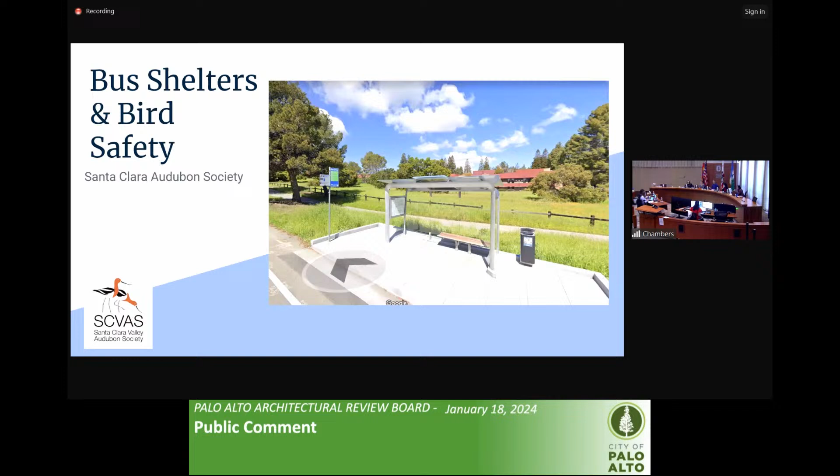My name is Shani Kleinhaus. I am the environmental advocate for the Santa Clara Valley Audubon Society. I live in Palo Alto and I'm on the PRC, but I speak for Audubon today. This is the presentation about bus shelters and bird safety. I have a little history with the ARB.

This is a bus shelter on Arrastradero. As you can see, it's in the Stanford Research Park, and as you can see, it's completely transparent.

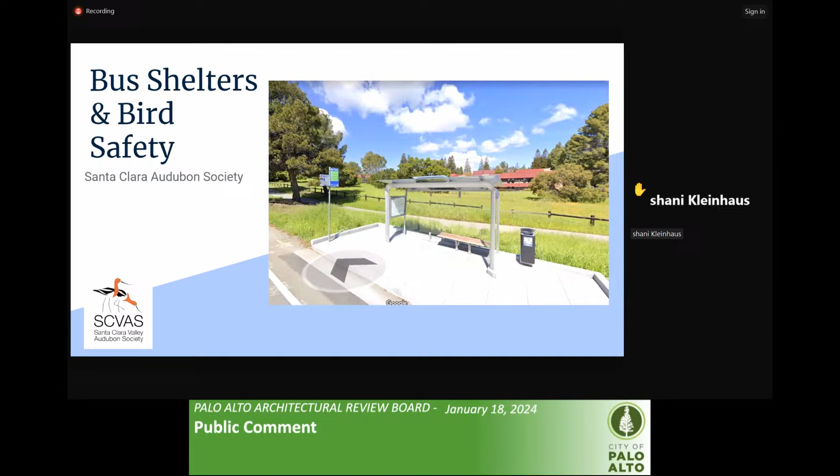Next slide, please. A billion birds die each year due to collisions with glass in buildings and other man-made structures. The science shows that it's best to avoid transparent structures, and if you use them, there need to be visual cues for birds. Studies show that dust and graffiti on bus shelters, as unpleasant as it is to the eye, actually reduce bird collisions significantly.

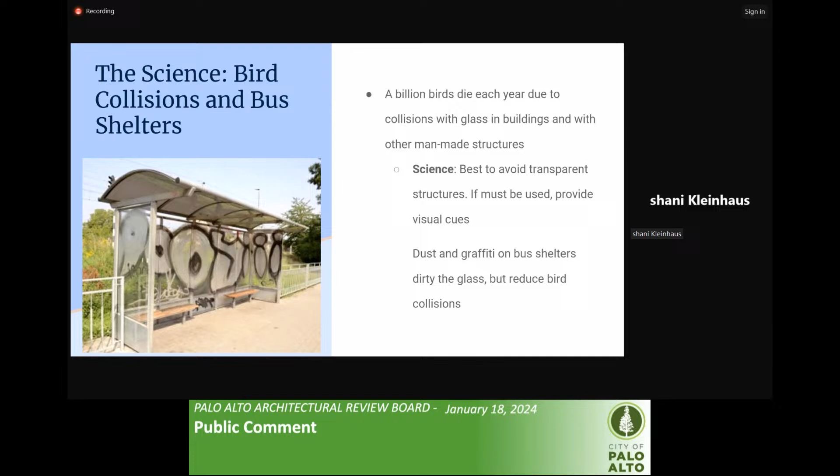Next, please. These are some shelters at Google. You can see they use cues both for people, those larger cues, and then the thinner lines and leaf patterns are also used for alerting birds to the existence of the shelters. Next, please.

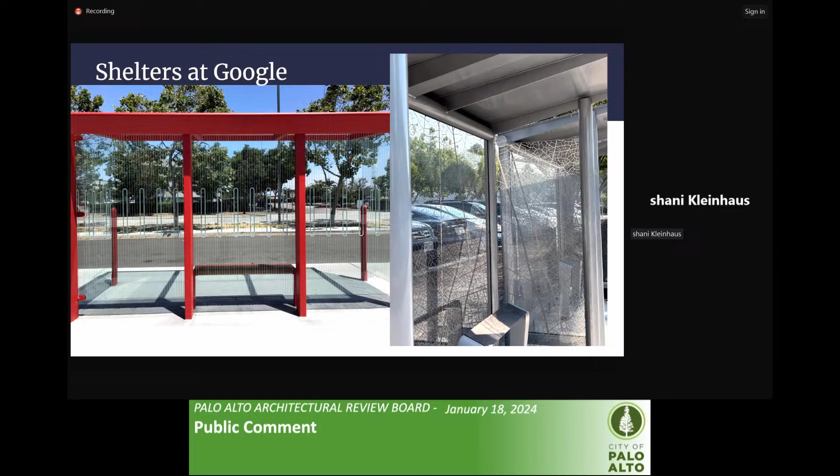So when I started seeing these transparent bus shelters at the research park, I approached our public works. I didn't know why these were approved. They told me it was VTA. I asked VTA, they said no, it's Stanford. I asked Stanford and I found out that it was the ARB that actually required them to do this. After a request from Stanford, last year they retrofitted the existing bus shelters with visual cues, and they promised to implement any new ones with the visual cues.

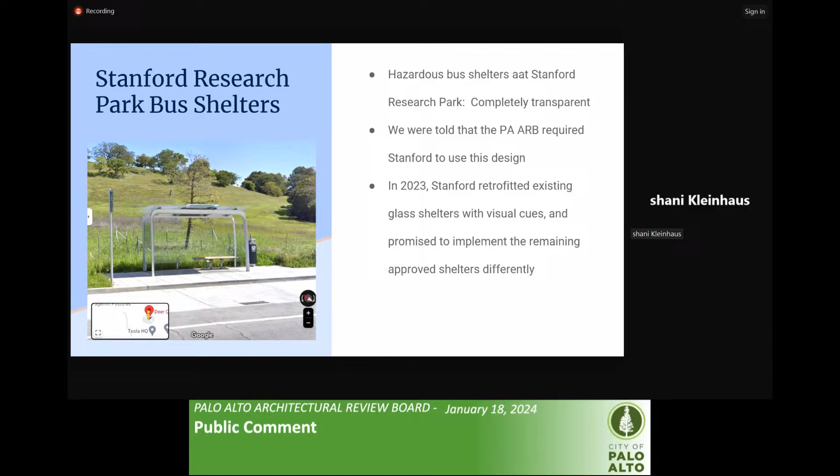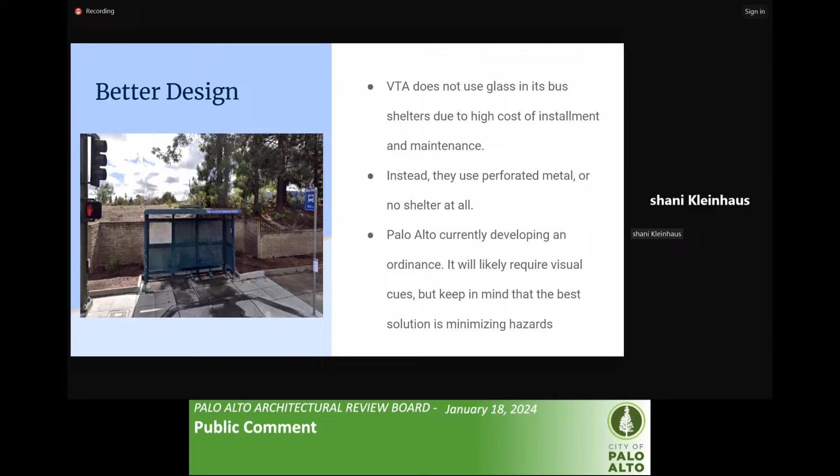So I wanted to just give a little pitch here. The VTA does not use glass in bus shelters, due to high cost of installment and maintenance. They use perforated metal or no shelter at all. Palo Alto is currently developing an ordinance for bird safety and dark sky, one or two ordinances, which will come to you soon, and will likely require visual cues. But I just wanted to remind you that the best solution is to minimize the hazards and not even create them at all, rather than to try and mitigate them. That's it. Thank you so much for your time.

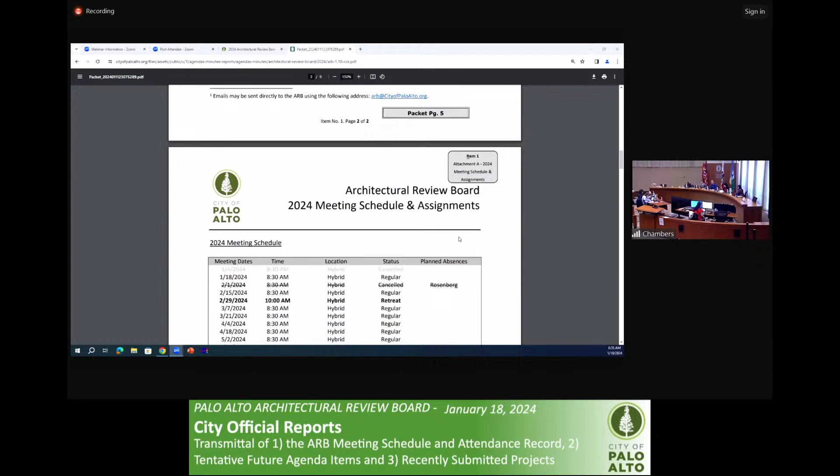So just to note that we are planning to cancel the February 1st hearing, but we do expect to have items on the 15th. We're kind of still resolving what that agenda will entail, but we do expect to have a hearing that day.

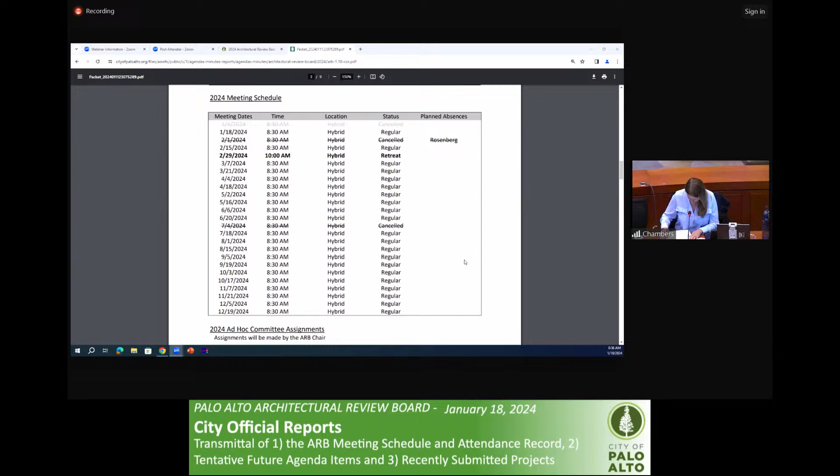There have been some new projects submitted. Hold on one second. There was a new project submitted at 833 Los Trancos Road out in the open space area. This is going to be an accessory structure, but it's a new building, and the open space requires a site and design review. So they are submitting an application that will come forward to the Architectural Review Board. It has an attached accessory dwelling unit, along with other accessory uses.

There is also the project before you today, 1066 East Meadow. And then there was a new project submitted, 3265 El Camino Real, which—I think this is the project that was looking to do teacher housing, right? Yeah, I'll update that summary, but it's affordable multifamily, 100% affordable multifamily, but also specific for teacher housing.

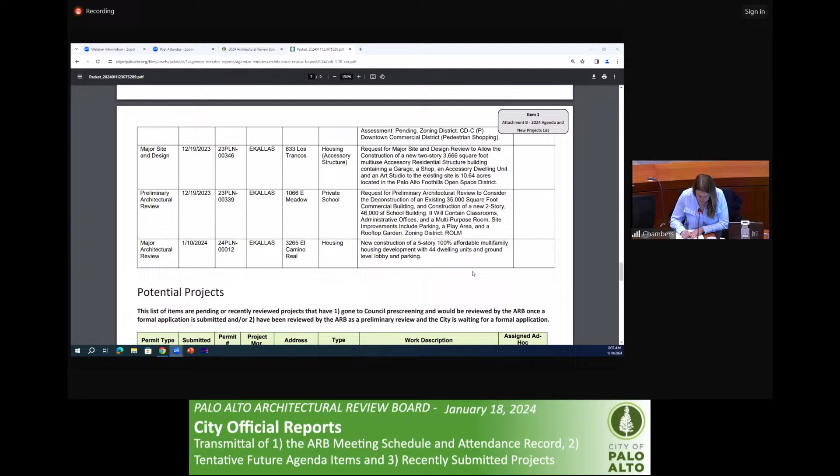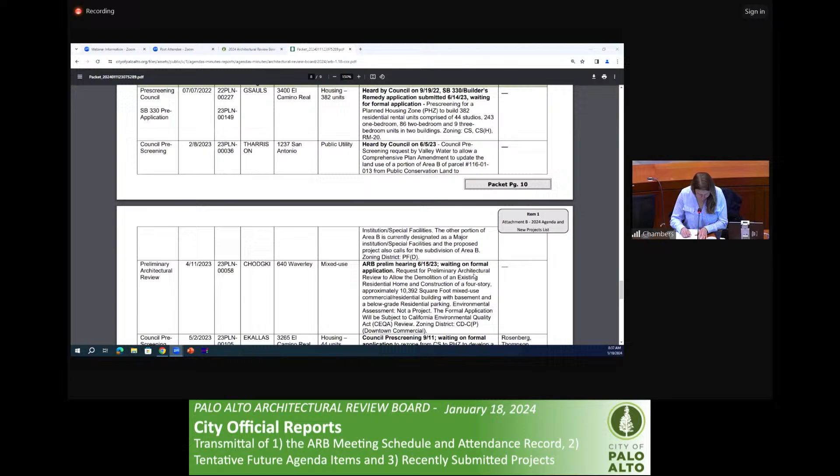And then there was a new SB 330 pre-application submitted along San Antonio Road at 762 San Antonio Road for 198 multifamily residential units. So if you would like to assign an ad hoc committee to any of those.

Wow, yes, we would. So colleagues, we have 4 projects that potentially need ad hoc committees. Let's go through them. The first one on Los Trancos Road, I don't believe requires an ad hoc committee. Does anyone feel otherwise? It's a residential small project.

The second one on East Meadow, that's what we're going to be looking at today. I suggest we wait till we finish hearing from this and then perhaps assign an ad hoc committee to follow up on that. Next one is a rather important housing project.

I'd very much like to assign an ad hoc committee to that. Do I have any volunteers? I'm seeing Board Member Rosenberg, Board Member Hirsch. I'd like to assign Rosenberg and Hirsch to that, please.

And lastly is the SB 330 project on San Antonio. I would like to be on that subcommittee. Would anyone like to join me? May I? Board Member Chen. So Baltay and Chen, please. Great, thank you.

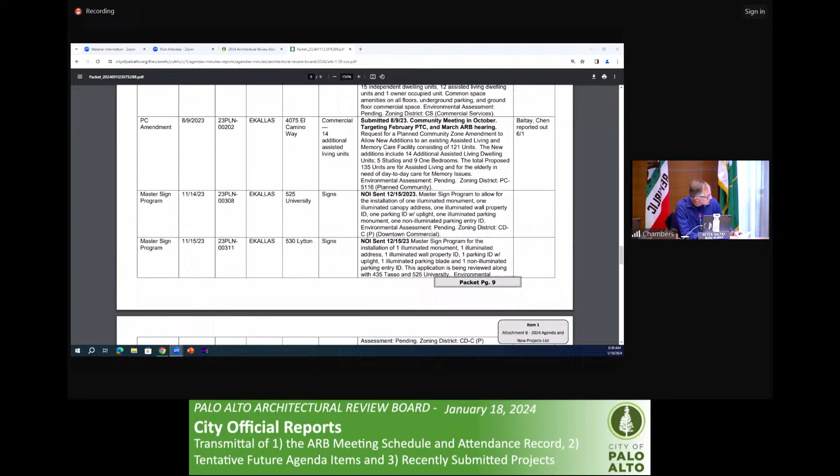In that vein, I'd like to ask my colleagues that we have 2 other ad hoc committees. One was on 739 Sutter. We heard that project recently, and I had assigned Board Members Chen and Adcock to a subcommittee. I'm hoping to hear back from you on the status of that project. I understand it's been resubmitted. And I'd just like to have our board follow up on that if we could. So this is a gentle nudge to stay on top of that one.

Wait, can I just add a quick note on 739 Sutter, if you don't mind? 739 Sutter did resubmit an application, and so I will send that out to you guys to take a look at the revised application. They did make some of the changes that were requested. Specifically, they did take off all the rooftop decks. So there are some somewhat substantial revisions that were made for that project. And just for clarity, it's board members Chen and Adcock.

Okay, thank you. And lastly, we have an outstanding ad hoc committee on objective design standards relative to townhomes. And I have in my notes that we'd asked Board Members Chen and Hirsch to report back to us with some proposal for what those standards might be. That was a bit of a homework assignment and we haven't heard anything back on it. And again, a gentle, maybe not so gentle nudge this time, that we'd like to get some progress on that. That's something the planning department is open to our suggestions on, but they don't have the resources to invest much themselves.

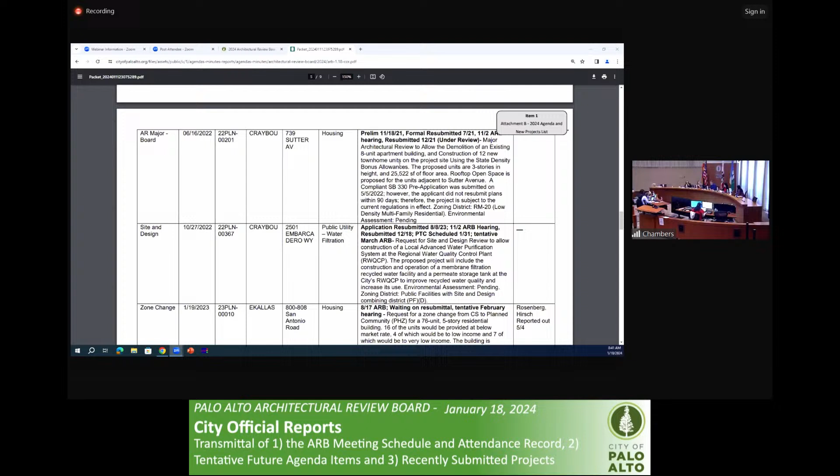And Chair Baltay, could you please clarify for the ad hoc committee what the specific final homework assignment is that we would be looking for? Sure. As I understand it, they did a bunch of research on townhomes, and sort of from a broad perspective, what development standards might be appropriate and useful. And we had asked them to try to formalize that into some actual language of what the standards might be. So it's actually writing out a series of objective design standards relative to townhomes.

So you have a budget for this? Just kidding, just kidding.

That's right. So we're looking for some stab at what that might be. We would have to coalesce behind it and feel that it's both appropriate and proper for passing it on to the planning department. But we have the opportunity to do that. We have been pushing hard to do that. So we've put that into subcommittee.

Yes? To respond a little bit- no, I don't want to discuss it now because it's not agendized. Just understand that we were sort of put off when planning told us that really there's no intention to move forward with something like this. So that's why we sort of stopped at that point. If you could speak into your microphone, Board Member Hirsch. I just heard you say you were put off when the Planning- well, we met with the director and he hoped that he would have some positive response, but he did not.

Well, I think we should be careful on that. It wasn't that he had a negative response. It was that there's pressing needs on staff's time, and he didn't feel he had the resources to put into hiring a consultant to develop this kind of thing.

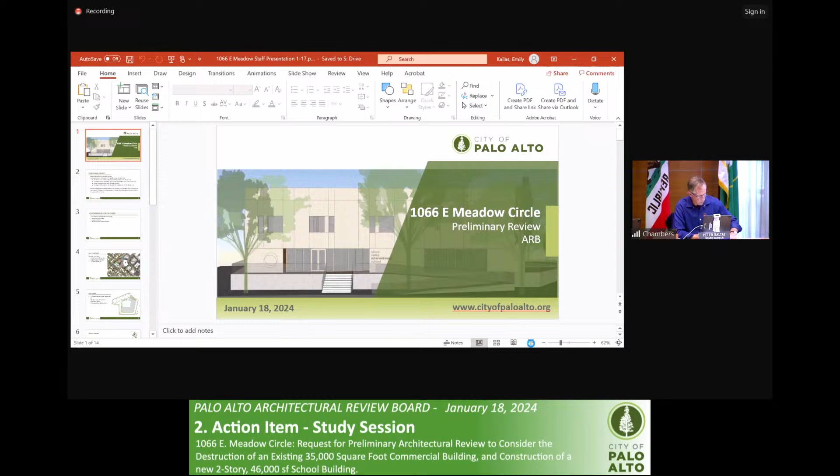So I remind everyone, this is a study session. We're going to hear from staff, we will hear from the applicant, we will hear from the public, and the board will provide comments and feedback on the proposal. We won't make any decisions or provide any recommendations to the planning department.

Okay, staff, could you go ahead please? Hi, good morning, my name is Emily Kallas and I am the project planner for this project. As Chair Baltay said, this is for 1066 East Meadow Circle preliminary review.

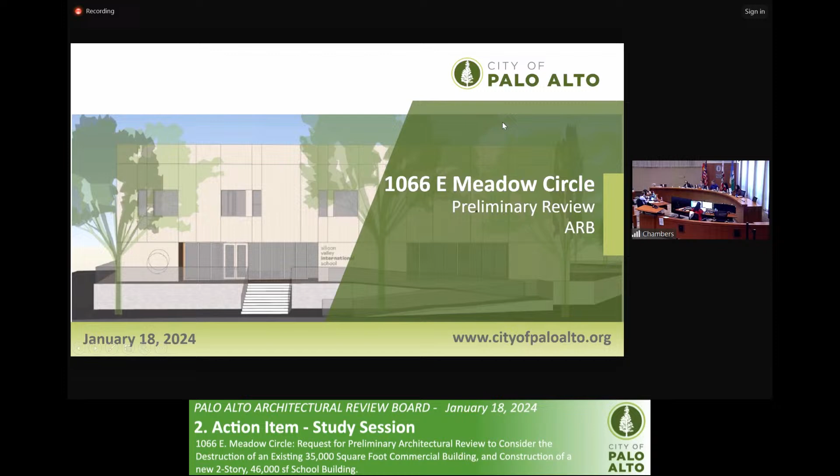The proposed project includes construction of a preschool through second grade campus with 26 classrooms and 3 multi-purpose shared spaces, for a total of 46,000 square feet. The project includes 3 outdoor areas, including one on the second floor and one on the roof. The site plan includes queuing space for drop-off and pickup and 58 parking stalls. This project is in the flood zone, so it also includes grading a 6-foot platform to elevate the building.

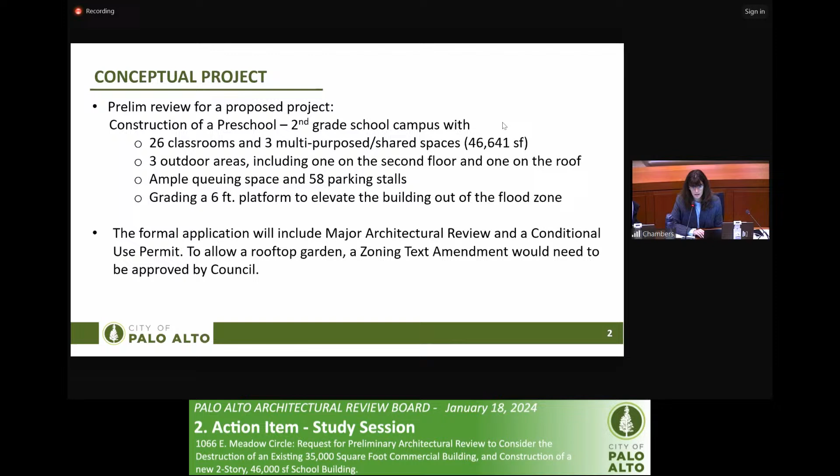The formal application will include major architectural review and a conditional use permit for the school use. Additionally, and I'll discuss it more later in the presentation, to allow a rooftop garden, a zoning text amendment would be required to receive council approval to amend the zoning code to allow a rooftop garden in this zoning district.

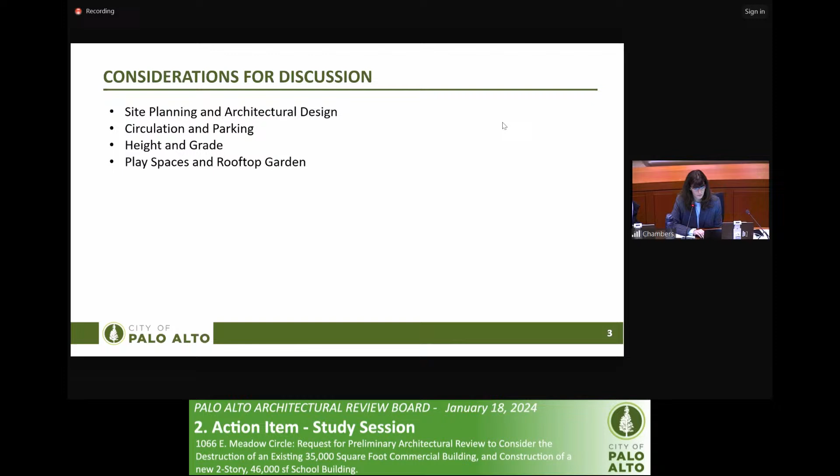Additional topics for consideration for discussion are the overall site planning and architectural design, circulation and parking, the height, grade and massing of the building, and the play spaces and rooftop garden.

This site context along East Meadow Circle is bordered by the Eichler Swim and Tennis Club to the rear, single-family residential neighborhoods off of Louis Road and Greer Road, and 1 to 2 story office uses on the circle itself. This property is also zoned ROLM, which is a research office and light manufacturing.

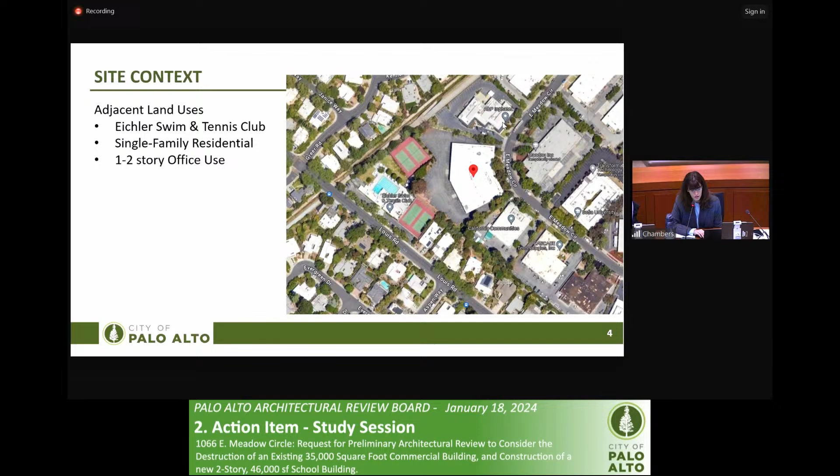The site plan includes a U-shaped building facing the parking lot area. There is a 2-lane wide drop-off corridor, 58 parking spaces, and the play yard shown here is built up at the platform level to have grade separation between the parking area and the play area.

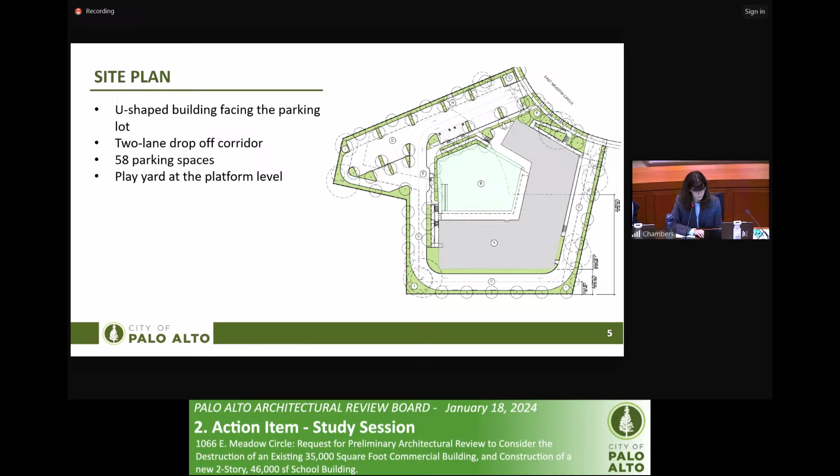This is an overview of the floor plans for the 2-story building with the rooftop garden.

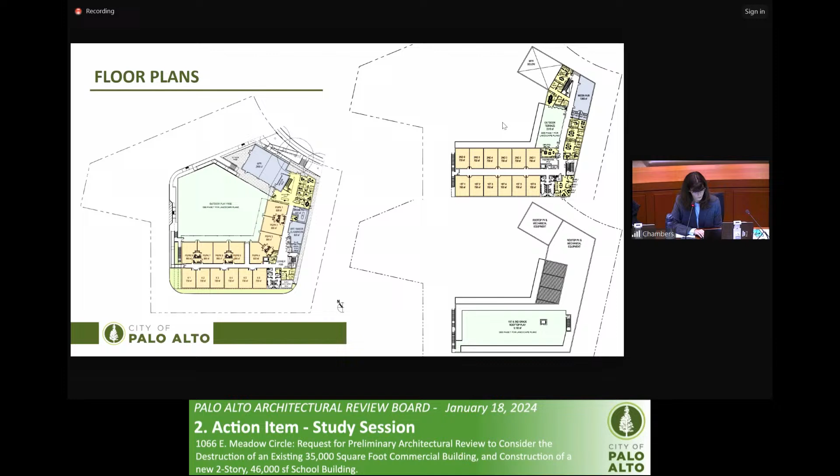One item to note, because this is in the ROLM zoning district, there is a floor area bonus for childcare facilities. So the portion of this project that is operating as a preschool, that area, which is about 8,000 square feet, is not counted towards the floor area maximum for the site. There is also a bonus to the maximum floor area equivalent to 50% of the floor area that is used as childcare.

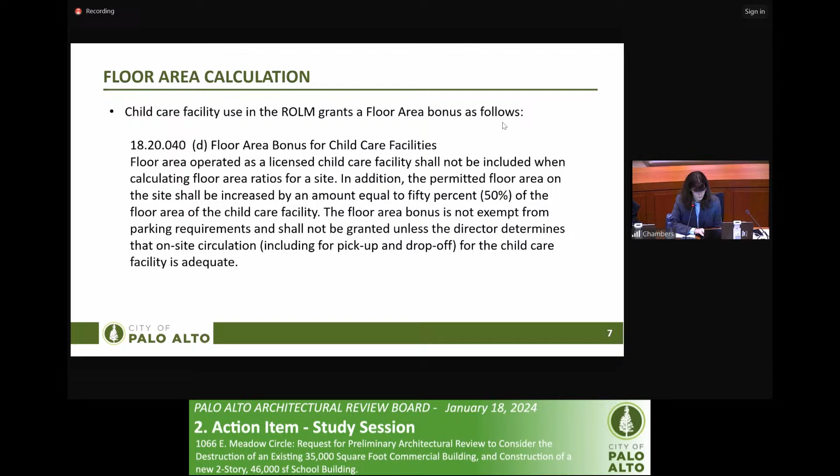These show the preliminary landscape plans. One item to note here is that a basketball court area is proposed for the rooftop garden. The second floor terrace appears to primarily be for seating, and then the first floor play area is the primary play space for the preschool through kindergarten grade levels.

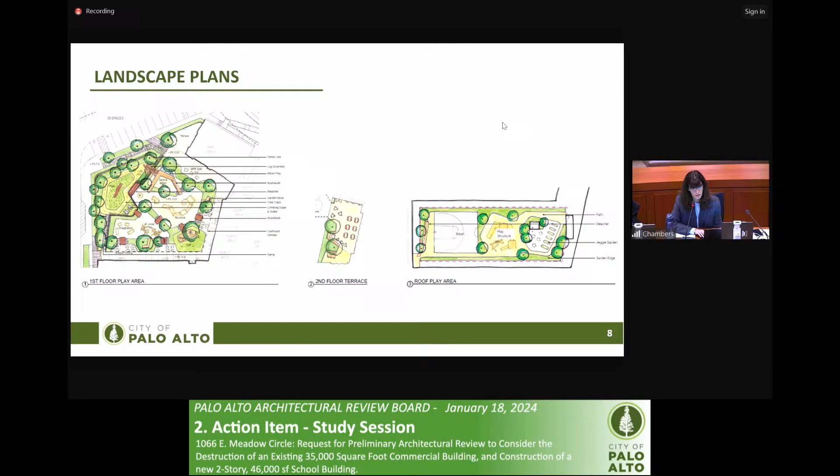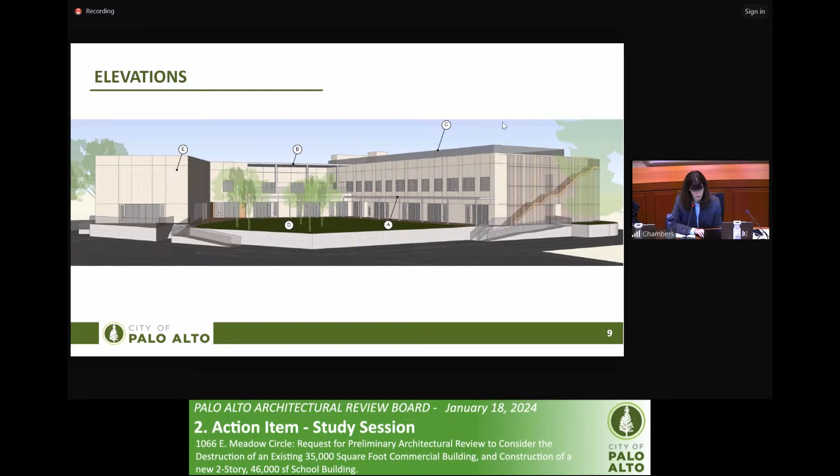These designs are still preliminary and would be subject to change upon the formal application, but we would definitely appreciate the ARB's feedback.

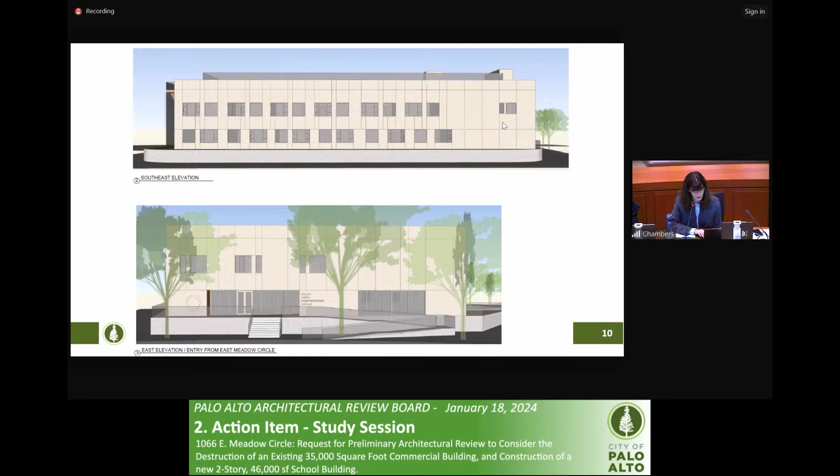Additionally, the rooftop garden shown is proposed to exceed the maximum height, which again would require a zoning text amendment.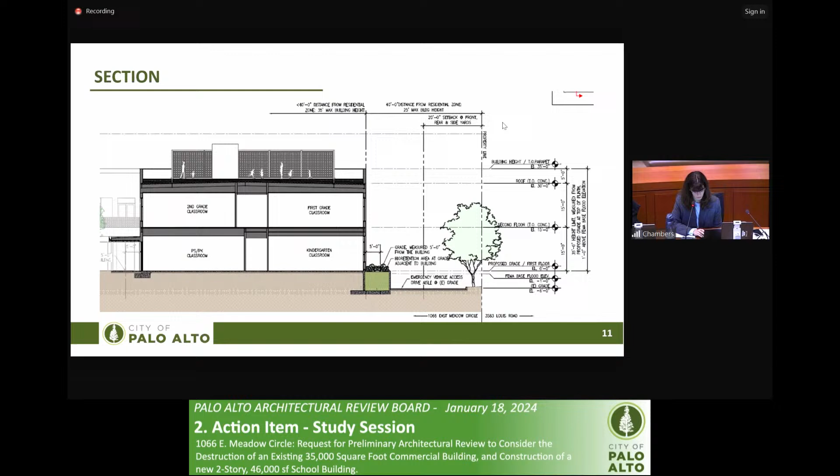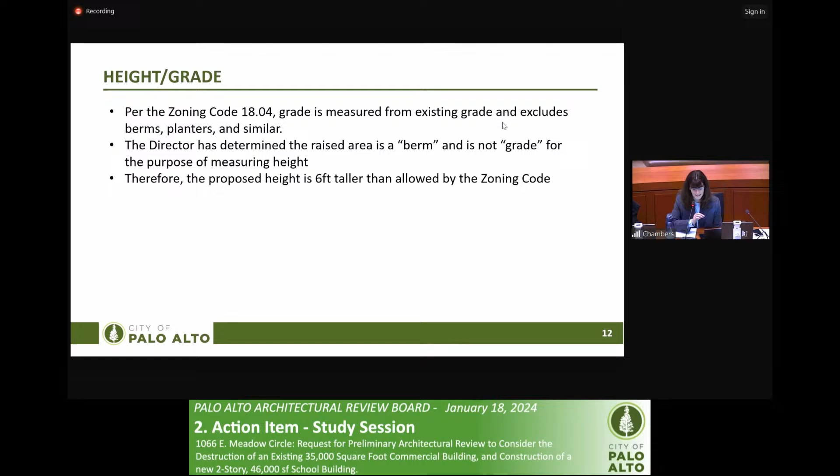Specifically in the definition section of the code, grade is measured from existing grade and excludes berms, planters, and similar features. Because this is considered a berm, that is why the height needs to be measured from existing grade.

This concludes my presentation. The applicant, Michelle Huber, is present and has a presentation as well. Thank you.

Before we move on, do we have any questions of staff on their presentation? Go ahead, Board Member Hirsch. Give us one second while we ask some questions.

On the floodplain issues, are you allowed to build into it as long as whatever you build has some kind of waterproof perimeter? Is that a possibility?

Public Works Engineering Department requires the finished floor of the building to be 1 foot above the base flood elevation. So in order to construct something that meets FEMA requirements and local regulations, it does need to be elevated somehow. The question here isn't about how much it's being raised, it's how the maximum height of the building is being measured, because they will need to elevate out of the floodplain regardless.

To follow up, that applies to habitable space, correct? Not necessarily uninhabitable space. For commercial versus residential, you can have uninhabitable space, like a parking structure, that could go there, but there would be a lot of waterproofing involved.

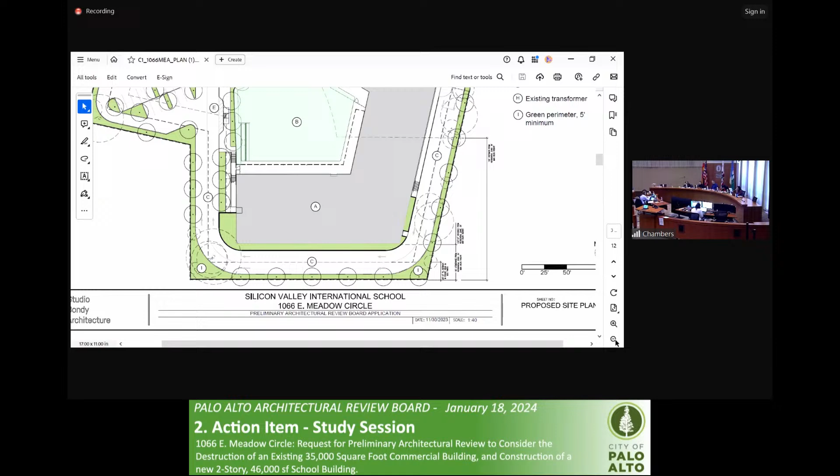You want to share your screen? Oh yeah, we'll share the screen for a second. Hold on. No, zoom out, or share the full screen. Yeah, zoom out. Zoom out, yeah, perfect.

So based on the street location, we would expect the rear to likely be, can you see my cursor? Either this one or this one.

But again, since the setbacks are the same on all of the sides, is there something in particular that it affected? It's 20 feet no matter what, whether it's interior or rear, gotcha. And there's no daylight plane requirement for it. Okay, thank you.

So you just passed a pop quiz, Emily.

Any other questions? Could you please explain to me, in the housing element this site is listed for housing, and I see in the report that it's not going to be any longer. Could you give us some background on that? We had a comment from one of the members of the public, a letter to us discussing exactly this question.

Yeah, so the adopted housing element right now includes this site. My understanding is that in some of the comments from HCD on our latest housing element, there were questions about the sites selected, asking for more assurance that certain sites would become housing, and/or choosing other sites more likely to become housing. So in response to HCD, there are some changes proposed to the housing element that would change some of the selected sites, including this site being removed, but others being added to still meet our RHNA. So whether council will adopt those changes or not is not yet known. But we have to treat it based on our current adopted housing element.

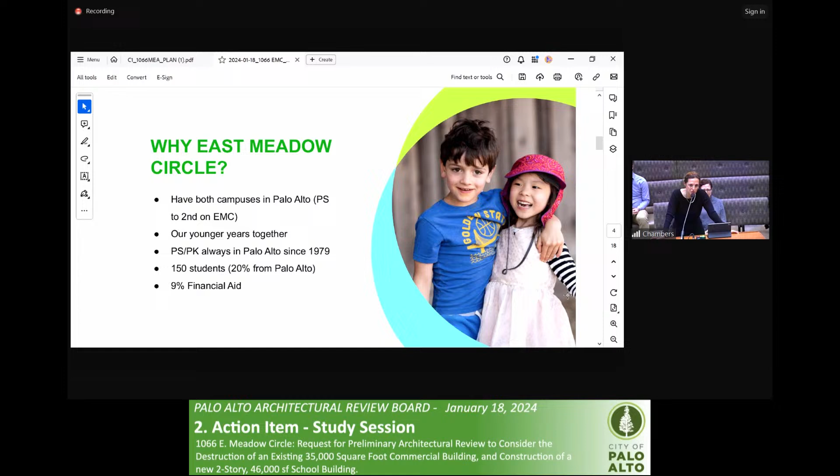Our school has this goal of welcoming students from all backgrounds, and therefore we dedicate 9% of our budget to financial aid. Last but not least, we've always been good neighbors in Palo Alto since 1979, and we intend to continue to do the same. We started open communication with our neighbors early in the process, sent them letters, let them know we were having this public hearing today, and so far we have received positive feedback from our neighbors. Thank you.

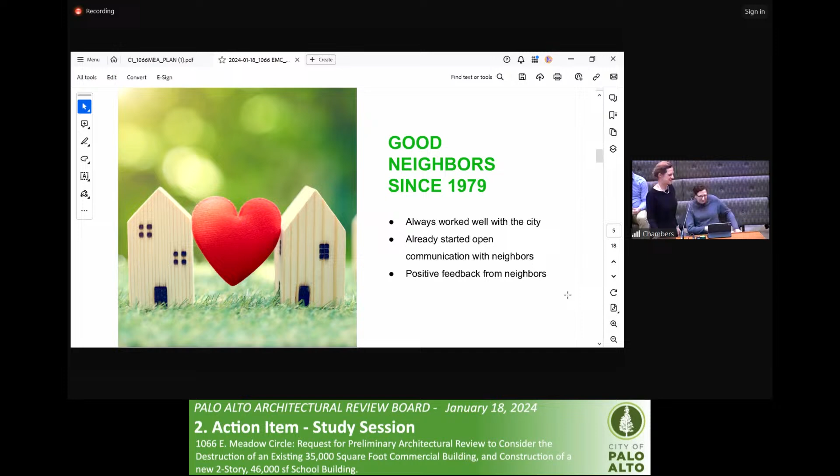Good morning, my name is Michelle Huber. I'm a principal at Studio Bondy Architecture. My name is spelled M-I-C-H-E-L-L-E H-U-B-E-R.

We are very happy to have the chance to present our project to you, answer your questions, and get your feedback. In particular, we hope to get your feedback on some of the elements discussed by Emily Kallas, which is our building height, our outdoor spaces and play areas, and in particular the rooftop garden. A lot of the images you will have just seen, but we want to add a little bit more detail and hopefully answer some of the questions that came up during the staff questioning.

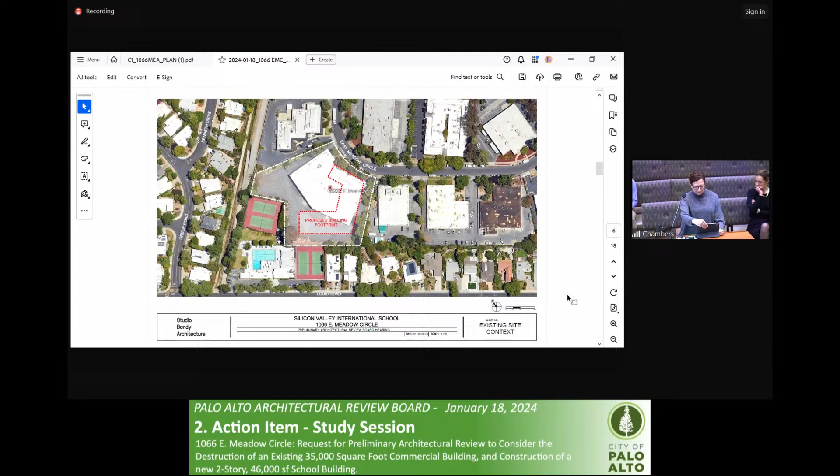Just to start, we have outlined our proposed building footprint on the existing site. In red, you can see it superimposed over the existing building. To give you some visual context, these are some images of our neighbors, and the existing building is the image at the top.

This is our proposed site plan, which has been a little bit developed since the images that we submitted with our application. We're showing the integrated context of the landscape design with our site plan.

The design intent for the site was to develop a site that would work best to support the school's program and mission, while respecting the context of the neighborhood, and in particular the privacy of our neighbors. So our design solution was to rotate this building so that it acts as a buffer, both acoustic and visual, for the large preschool play yard in the center of our campus.

As was described, our preschool program will have 160 students and will be licensed through the state of California, which will then dictate the minimum size of outdoor spaces for this play yard. For 160 students, that's 12,000 square feet, which is what we're showing in this design.

This play yard will be designed to be age appropriate and developmentally appropriate for preschoolers and also for kindergartners, so that they can use this site when preschoolers are not using it. However, it doesn't work for our older students in grades 1 and 2 — developmentally, the design doesn't support where they are developmentally and the gross motor skills they're learning.

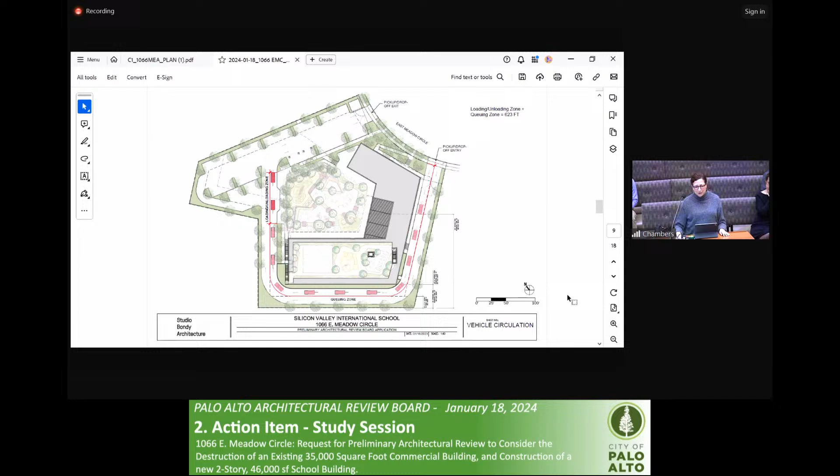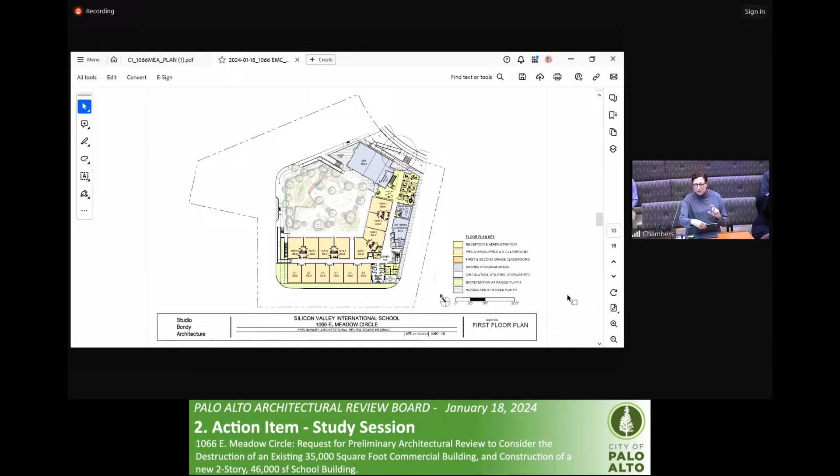The floor plans have already been discussed, so I'll just point out that the orange rooms in the diagram are our classrooms. Our preschool classrooms are designed to wrap around the preschool play yard and maintain a direct indoor-outdoor connection to those spaces. Our second floor we've discussed.

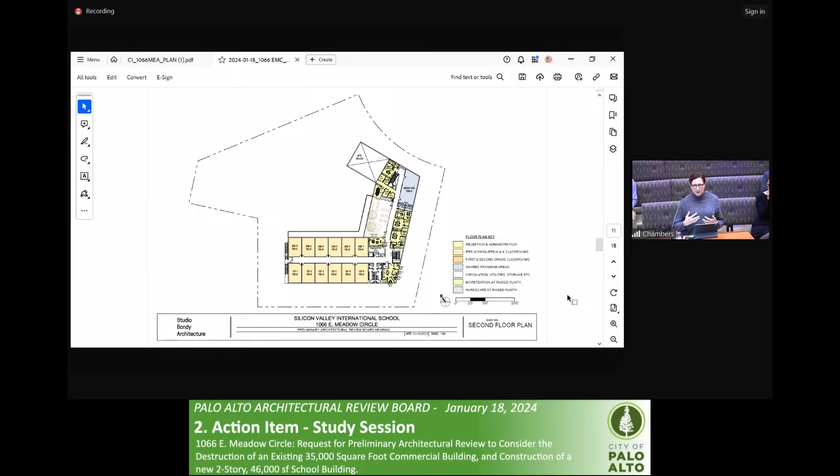The next two slides are diagrams that intend to show our design intent as we're trying to resolve two of the key challenges of the site.

We're in this flood zone, and per FEMA, we have no other option but to design our first floor to be 1 foot above base flood elevation, which raises the grade to roughly 6 feet. Because this is a requirement to build and develop on this site, our proposed interpretation of the Muni Code as it describes grade is that there's an exception when grade needs to be raised for drainage. It does exclude berms — berms cannot be counted as that point of grade, but elevated plains required for drainage are allowed to be considered grade. So our design proposes that approach to let us measure our building height from that new grade and reach the 35-foot maximum.

In terms of our rooftop garden design, we are proposing to locate all of the rooftop structures at a maximum of 12 feet above the allowed 35-foot height limit, which is our reading and understanding of the design guidelines for rooftop gardens. In addition, there's a 45-degree angle that describes where the rooftop structures are allowed to be located, measured from the edge of the building and the top of the roof.

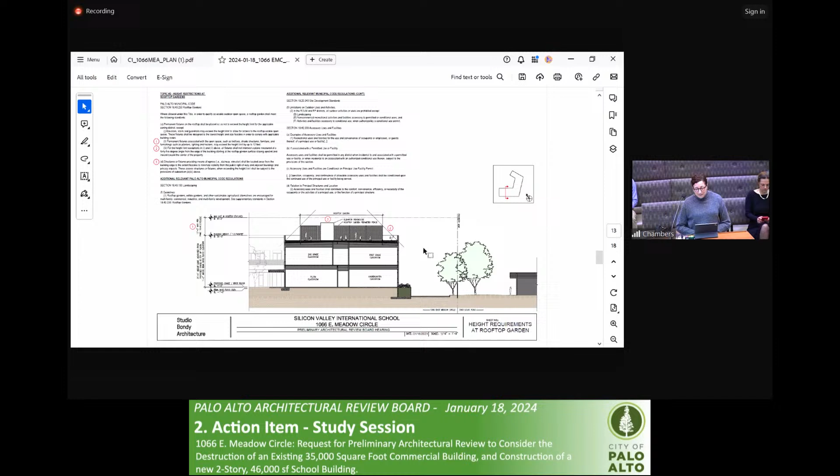So we're in very early stages of designing this rooftop garden, and we're hoping to take your feedback to incorporate into the design. This is our early concept for a rooftop garden appropriate for first and second graders. It includes a half-court basketball court, a small play structure, and about a third of the rooftop area would be garden with raised planter beds to support the school's garden program.

If I could interrupt you for one second. Sure. Your time is over, however we would like to hear from you. How much longer do you think it would take to complete your presentation? Probably two minutes. Please go ahead, we really want to hear what you have to say. Thank you.

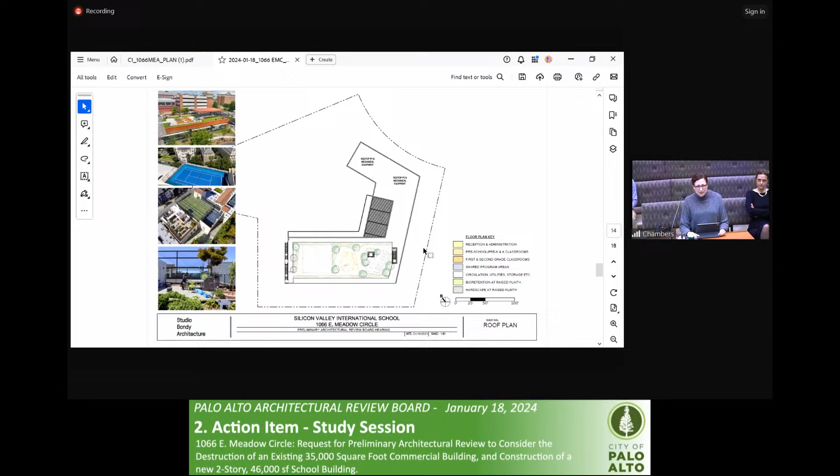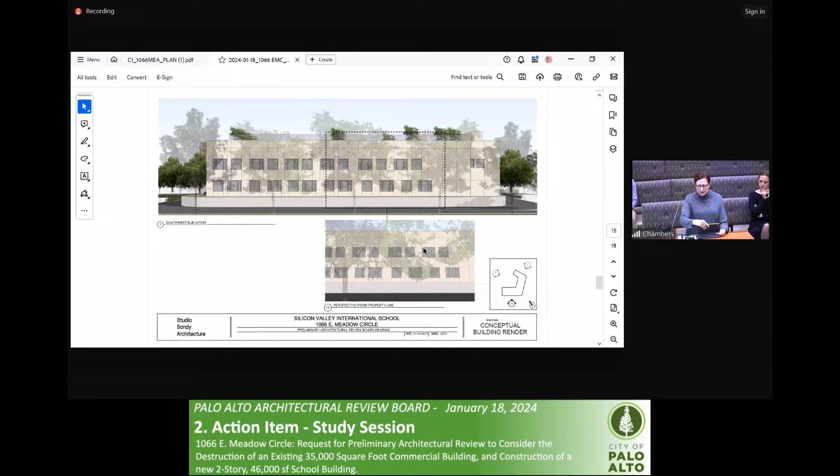Very quickly, to describe the design intent for the building itself: it's meant to be a straightforward building with clean, modern lines and a modern aesthetic, using the joints and reveals of our EIFS system and a recessed entry to provide some interest to the front facade, and then integrating the plinth, the required raised elevation, as elegantly and simply as possible.

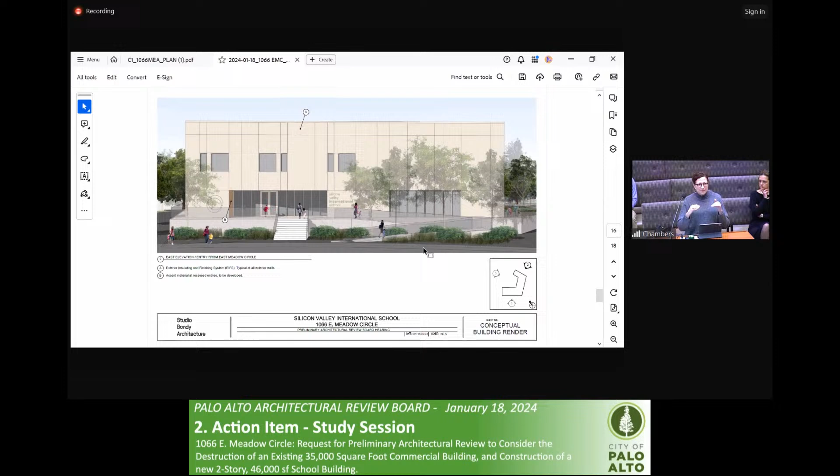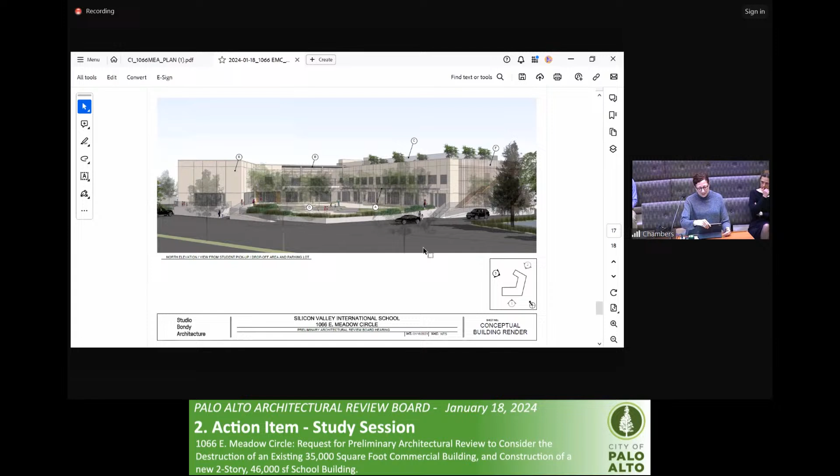No, that's it. Very well, thank you. We'll close the meeting to public comment and bring it back to the board for questions of the applicant. Board member Hirsch, you were starting before, would you like to go ahead?

Maybe you could describe a little bit the circulation, how the buses will pick up and drop off. Another board member asked about your plans for private vehicles, pickup, delivery, etc. I think I'll defer to the head of school, Barbara, on that question.

To answer your question on the busing, we're currently developing a busing program for our 2 campuses. The one in Menlo Park has a busing program with 2 buses, one coming from the north and one from the south, picking up about 60 students daily. Our current campus in Palo Alto doesn't have one yet, but we're looking into developing a similar pattern for next year, coming from north and south. The difficulty would be having a busing program for preschoolers, but you can certainly have one from 1st grade to 2nd grade.

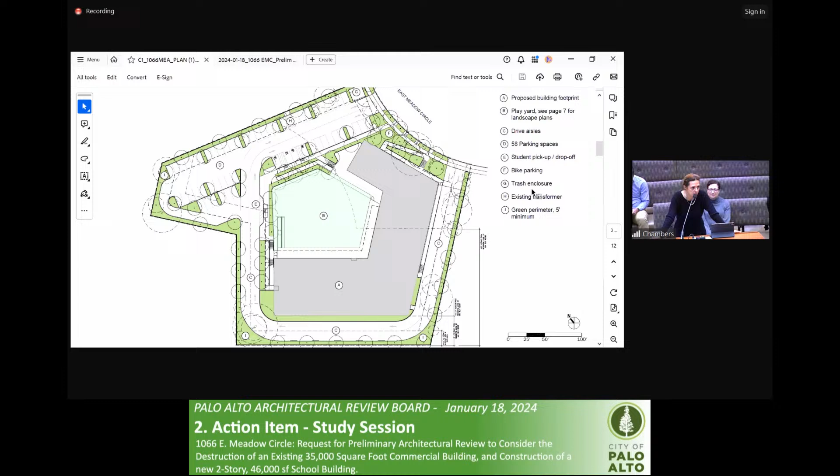Where? We just brought up a visual—it's where the E is on the site plan. The E on the site plan is the designated drop-off spot. There's a bit of a curb indent. Perhaps the applicant can speak more to whether all cars would be using the indent or just the buses, but this is the designated drop-off area.

What we do at our current campuses is have multiple drop-off times—kindergarten is not dropped off at the same time as 1st and 2nd graders, and preschoolers are also dropped off at a different time. So there will be three separate times for drop-off and pickup, about 15 minutes apart each. The spot marked E would be where parents drop off, and parents of pre-K and preschool students would be parking.

I have a few more questions, but let me try to understand this myself. Let's talk about normal teacher parking for a minute. Is there a circulation where they go into the cul-de-sac of the site as a normal method of getting to a teacher's spot, passing by all the potential teacher spots on the way into the parking? Otherwise you'd have some spots left over, which isn't going to work very well.

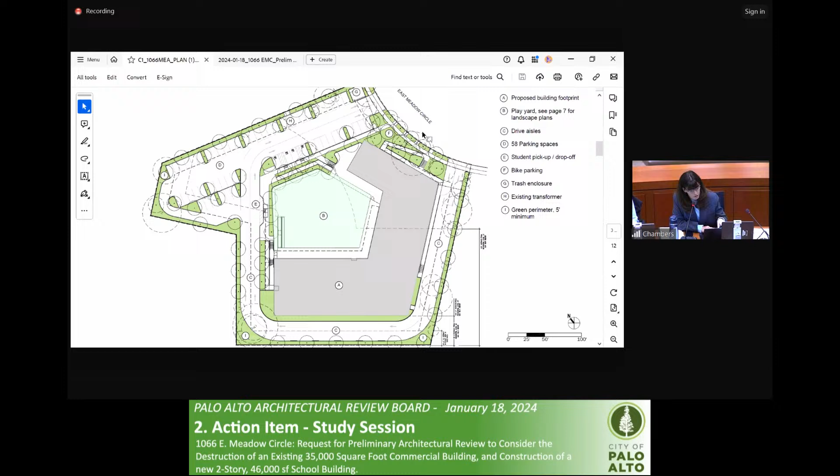If I may add one item we haven't discussed yet, the site plan does indicate it will be a one-way drive aisle, with the two driveways, the one further to the right being the entrance and the one closer to the parking spaces being the exit.

Yes, correct. No, the circulation - this is from my own personal experience with my grandchildren, trying to pick them up after school time, it's a mess. And I think that the solution is here. I just wanted to describe it.

Let's see if we have any other questions regarding the circulation, anything like that. So just stay focused on these subjects. Anybody have anything about site circulation, transportation?

Just a minor follow-up question regarding the bus versus the regular first graders. You mentioned it was a 15-minute drop-off time. So if you have a bus coming with 20 kids, that takes some time to get all of those kids out, and then all the parents are waiting behind, correct? Is that how you're intending it, or does the bus pull off?

So the way it's currently working on our Menlo Park campus is that the bus is dropping off at a place where it's not blocking the circulation for the parents, and we intend to do something similar.

Yeah, that makes sense. And spot E seems like it would be blocking the flow for parents waiting behind - you would need to designate another spot. Spot E is for drop off by the parents.

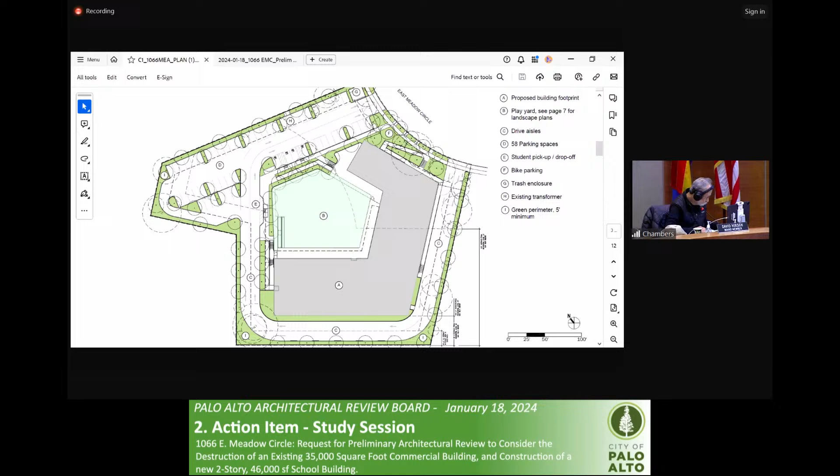Hi, thank you for your presentation today. I have a few questions regarding the circulation as well. Mine are more in context of - I can see how this is working, I can understand Board Member Hirsch's commentary. I've got several experiences recently with preschool and kindergarten drop-off myself and have thoughts, but at this time I'm going to focus my questions on these conditions here and here.

So if you can see the blue marks, it appears this entire wall coming along here - you see it on the large screen? Okay, so that long extent of wall, if I'm understanding correctly, that's all 6 feet tall approximately. It might even be 7 feet tall over in this back corner here if the slope is coming off.

The maximum height would be 6 feet. So do you know what the height is over at this entry area? It would be slightly lower, the grade is lower there.

So there's no sidewalk next to this drive aisle. It really is a drive aisle directly next to a sheer 6-foot tall retaining wall. Is that correct? At the elevated grade, there is a walkway that would be part of our egress, but at the drive aisle, you're correct.

So basically this is your walkway and then this is your greenery area. And on this outer perimeter, is that all at the lower grade adjacent to the drive aisle? This portion out here would be all at grade.

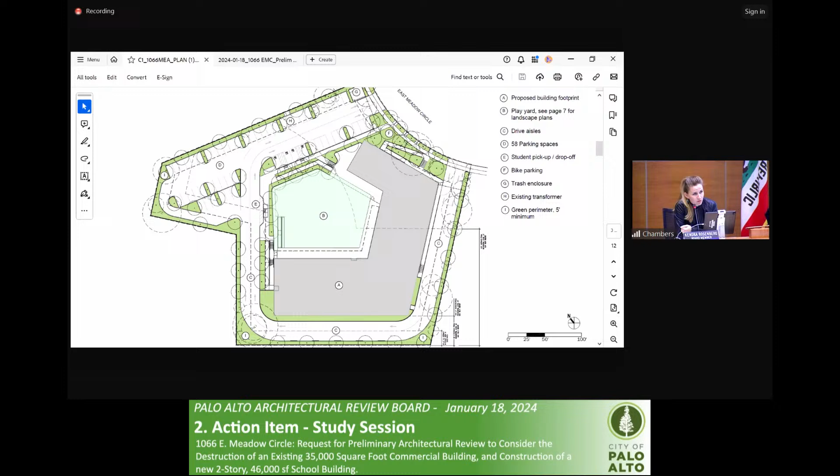I can see the looks between you two.

It's prohibitively expensive. Even though it's not a significant additional grade to excavate, you have to design it so that cars can clear those height minimums, and it starts to eat away at the perimeter of our play yard, compromising what we need to support the program. And again, it's prohibitively expensive, and since it would be designed in the flood zone, there's a more robust engineering requirement to meet the hydrostatic pressure there.

Thank you, that's all my questions for now.

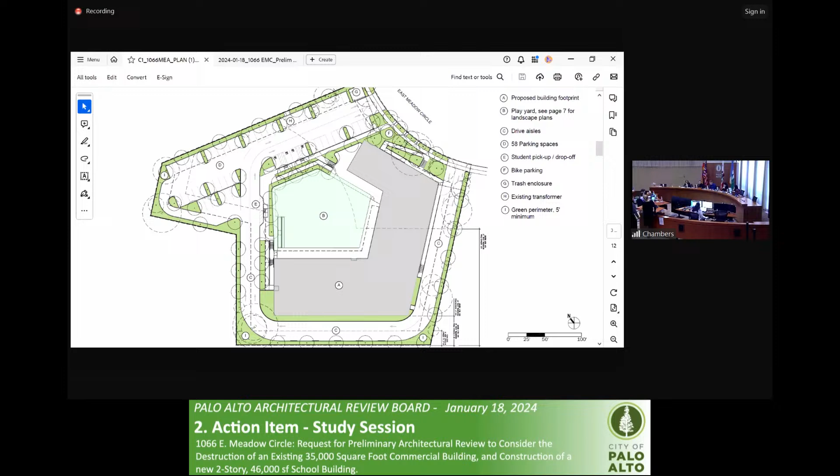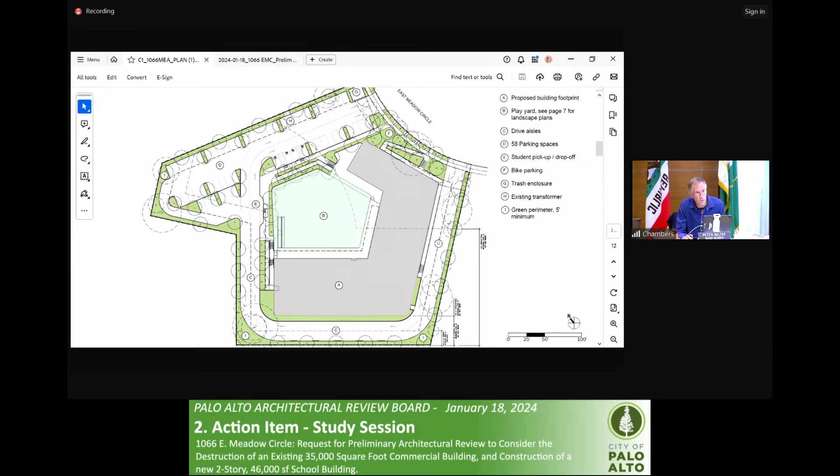I'd like to ask a question that'll bring us into the building design. After I've dropped my child off at Station E on your site plan, how does the child, my second grader, get into the building itself? Could you walk me through the morning path the student takes?

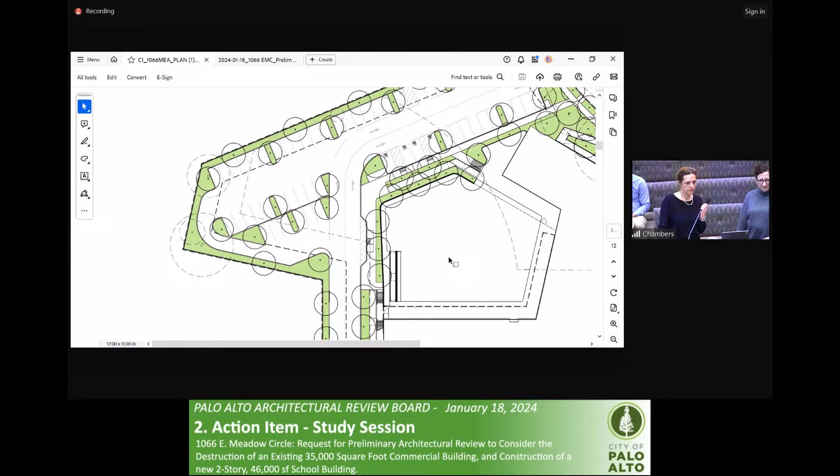They would be going directly to the classrooms, and we will have teachers and teacher assistants along the way to help them. Could you bring up the first or second floor plan so I can see? Right there, yeah. So I've dropped my student off at Station E, the crosshatched parking area on the left. How do they enter the building? Which door do they go into?

Depends on the grade level, but you have multiple entrances. There's one next to the multipurpose room, and you want one closer to the classrooms. This is for the kindergarten students, the one they will be taking, as well as first graders.

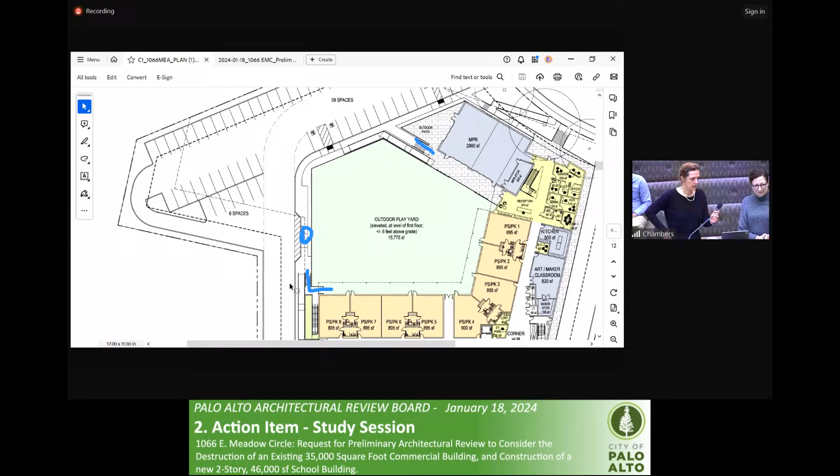So they would enter at the far end of the classroom hallway? Yes, and go upstairs. So you intend for the students every morning to come in down the hallway of the classrooms? For the pre-kindergarten, yes, because the classrooms are there. Good, they will be going directly to the classroom.

And if it's a rainy day or inclement weather, would they still be able to make their way across the play yard to the main entrance? It looks to me like where it says reception is the front door of the school. The reception area off of East Meadow Circle also has a secondary entry that goes alongside the multipurpose room. But for students, they could use that entrance, or, as Barbara pointed out, on the Southwest side, there is an entry that takes students directly to the hallway leading to the classrooms. Okay, well, thank you for making that clear.

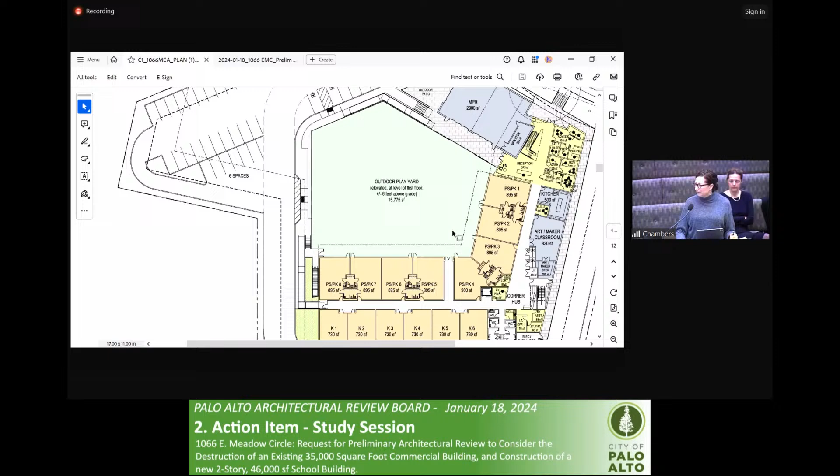Why did you choose to orient the courtyard of the building to the north? It's a puzzling parcel with seven property lines and oddly shaped spaces. But the fact that we could design a very efficient U-shaped building set up what seemed to be a good approach to protect the preschool play yard, with the building on three sides facing north. It was the best orientation for the size of the play yard.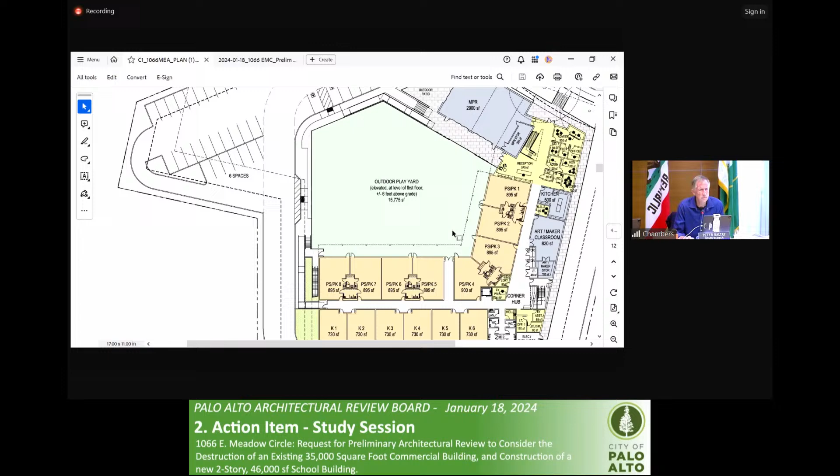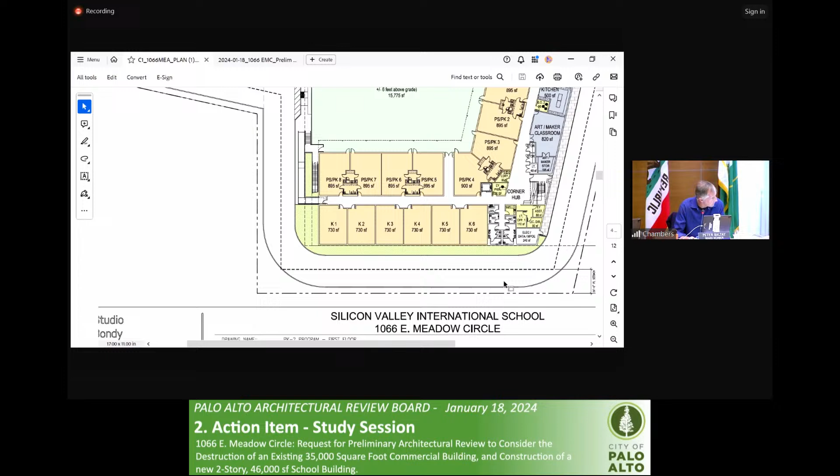Any other questions? Do you want to go into comments? The roof deck, you had some questions about that, Board Member Adcock? I do. Going back to, I had the same thought about below-grade parking. I'm just like you guys, right? And it's kind of a potential obvious solution.

Were you considering the garage under the playground, the preschool playground as well, using the entire plinth as the garage? And I know it's expensive, but it has potential to solve neighbor concerns as well and not have your rooftop garden be an issue. If you get all of your 58 parking spaces below the building, which seems plausible, then the teacher parking area on the bottom left in plan could be used for upper grade play area.

And therefore your construction of the roof with the basketball court and vegetable garden, that's not cheap construction either. So if you were to consider that as part of the trade-off and not need 10-foot fencing on the roof, and stay within your 35-foot limit—you already have the problem of 35 plus 6—35 plus 6 plus 10 seems to be a pretty significant ask given the single-story neighbors behind, other than the swim and tennis clubs. I would urge you to consider that some more.

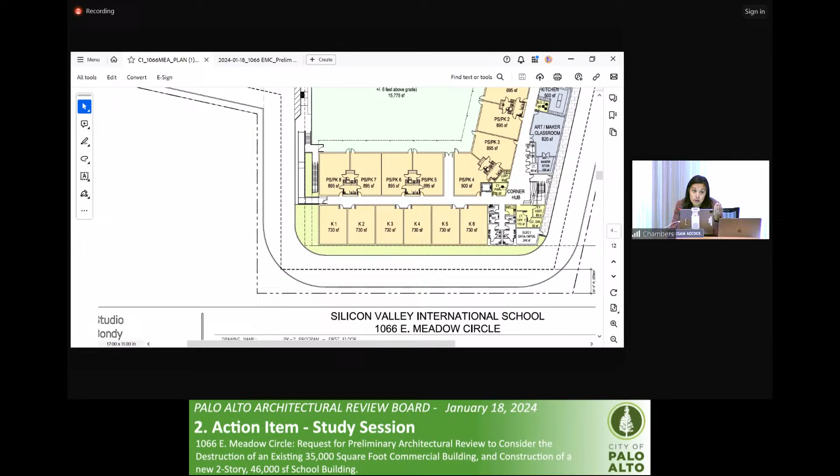The parking doesn't need to be very tall. You're already 6 feet above; you need a few more feet below. I would really urge you to look into that more. It sounds like we should do that study. We take your comments to heart.

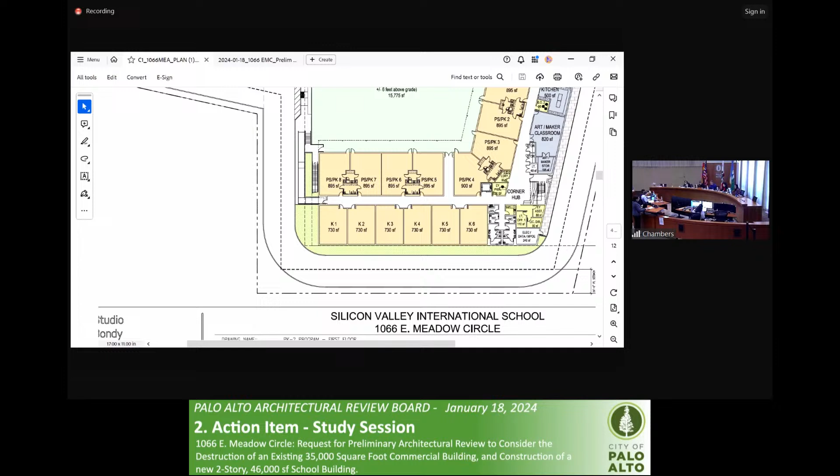Let's keep it as a point of clarification: the 6 plus 35 plus 10 would be slightly less than that because our fence line would be measured from the top of the roof, and there's a 5-foot parapet. So minus 3 or 4 feet. Minus a few feet, yes.

I have one question about the security. So it's a gated campus. Is there any other control point around the building? Our proposed design has a perimeter fence all the way around with gates, both vehicular and pedestrian. But the main security checkpoint is the reception area, which will have views to the two entries. And there will be a whole security design for the building, for the education use.

How about the long stairs along the sidewalk? The long stairs on the sidewalk would be within the property line, if I'm understanding. Yeah, the entry stairs would be outside of the perimeter fence. That would be the public access to the entry doors to the main entry. So there would be a security checkpoint at the entry doors. Okay, thank you.

On the sections, you show floor to floor height is 15 feet for each floor. So I know it's still preliminary design for now, but do you have any thoughts about the floor assembly? And what's the ceiling height for the classrooms?

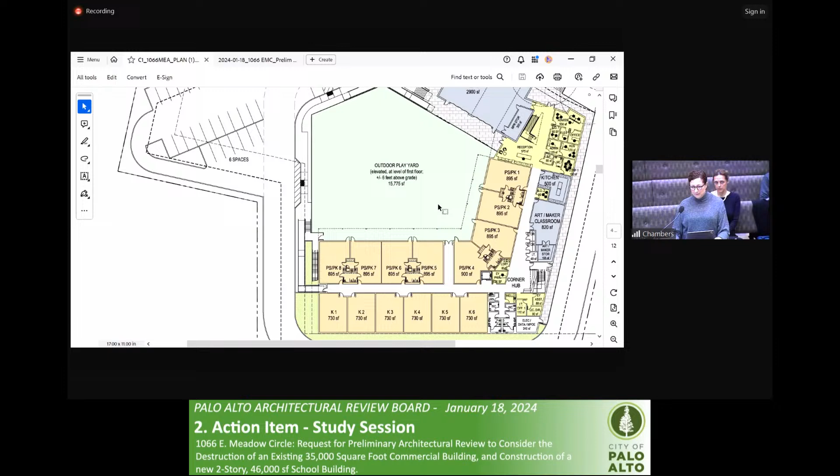I have one related egress question as well. From all floors, you're egressing out towards the parking on one side, with your stair on the left. The one on the right in plan, the stair behind the little corner hub, comes out to that raised platform and then has a stair. I'm trying to make the connection between your site plan and floor plan. It dumps you out into the drive aisle. Does the stair on the right dump out onto a plinth-height walkway that takes you along the east side of the building to the front, where they'd go downstairs or use the ramp to get to East Meadow? Okay, so your egress route is along the edge of the building all the way to the front.

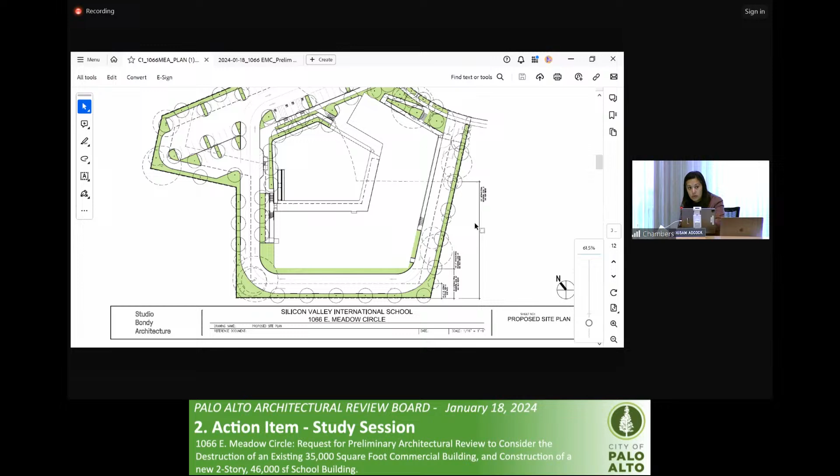On that one side, yes, which would require rated windows on your entire side. We have yet to meet with the city building department to confirm that, but my reading is that might not be required. We would definitely comply with whatever rating is needed.

Something to consider: if you're able to come down to the drive aisle and go to the street, within 10 feet, if your path of egress travel is along the edge of the building all the way around, pretty much all your classrooms, the offices, would all end up needing a 1 hour rated window at a minimum.

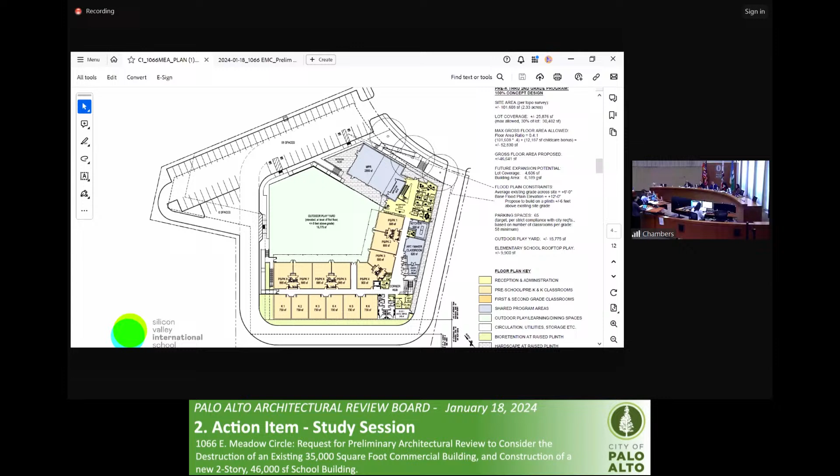We'll definitely check ourselves on that. I think it goes back to having a walkway along the drive aisle, which would solve multiple problems - I think it would extend the stair, but I think that's worth looking at, definitely.

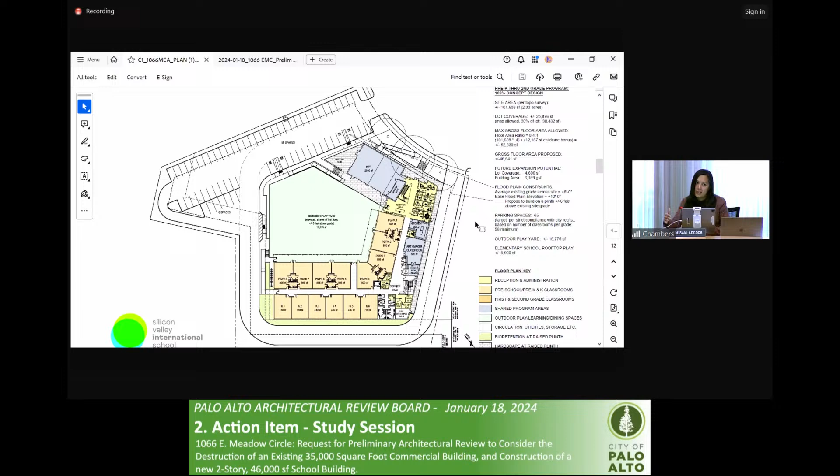Understood. We design a lot of schools, and this is always the issue. I think where you can develop good design, as you're describing, you also need the teacher element to direct and prevent parents from dropping off kids sooner than the drop-off spot. I think it's a combination.

Thank you, that's all my questions. Thank you for your presentation. Okay, Board Member Adcock, that was not a question, it was a comment - go ahead and continue with other comments on this project. I do not have any more comments. Thank you, no comments.

I'm sorry? Let's go into comments. We've been dancing around all of it. You want to, okay, you can ask a question, go ahead.

Just because it was mentioned just now, and if I don't follow up I'll forget it later: it seems very important that you create good access to the play area on the roof. The likely way to get there, the major staircase at that hub, is an enclosed fire stair. Wouldn't it be much better if it were an open stair, and that hub was more interesting, and it wasn't the egress stair? I really think it's important that somehow it's considered as an open stair, meaning we design in some way to find another location for the fire stair, because it's a very important connector in the whole building.

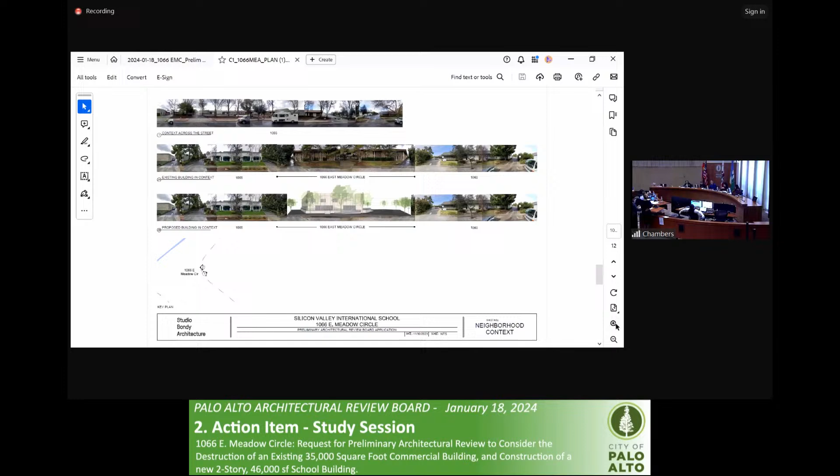If they bring up this photo, this image, that will help understand this. The real point is this, that you're saying you're measuring the height from your plinth. And when I look at your street elevation, your plinth is the farthest thing from landscaping. It's a constructed element of the building. And since when do we measure the height from the 6 feet up constructed front porch of a house or a building of any kind?

The center image on the bottom there, that plinth wrapping around the building is what you're saying is the existing grade. And I think any ordinary person looking at that would say no, the existing grade is where the road is. That's the interpretation you're going to have to meet. So unfortunately, it will just change everything on your parti.

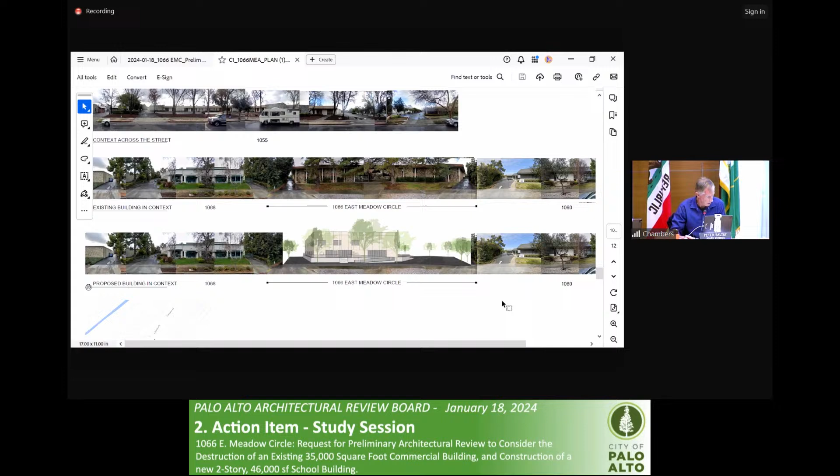My second thought is that you're basically putting a playground on the roof to allow a parking lot where the playground should be. I think that's just a fundamental basic thing that kids should be playing on the ground. Put the parking under the building. Once you do that, once you buy into that cost, which is the real reason you can't do it, everything else will fall into place so easily. You'll have all other kinds of cost savings.

The cost of putting a playground on the roof, the cost of what Board Member Adcock was talking about, 1-hour rated glass all around the building, that's expensive too. Everything else will come into place once you just put the parking underground. It's a 3-foot elevation on the ramp. That's easy, that'll fit without a problem.

Many architects deal with the structural post issues. You've got a lot of space, you could fit more than 58 parking spaces underneath. All of a sudden you'll have all this space around the site to do things with. You can slope the ground, you can do wonderful landscaping because you have all this room. It's just a fundamental parti decision on your project that's so hamstrung you as an architect. But I think you have to do that.

The third thing I think is that you've just oriented the building the wrong way, probably because of these other constraints. But I would think you want that second-story courtyard to face the sun. You want the kids to get some light. And right now it's the opposite - you're going to have the strong sun on the side of the building where the classrooms are.

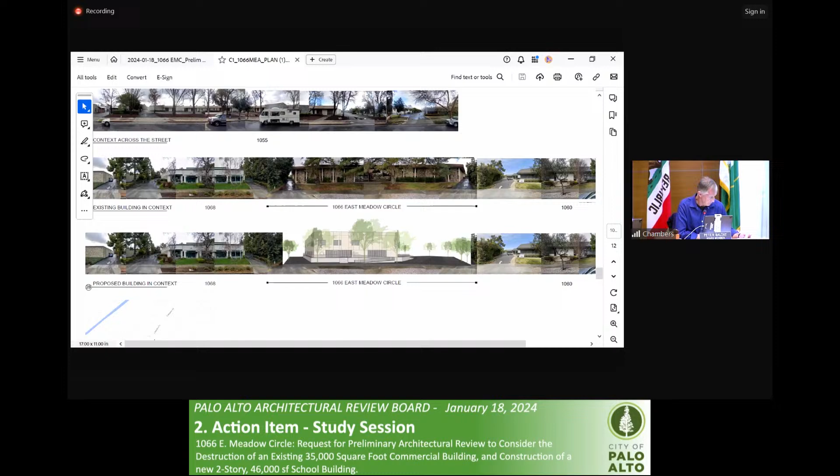I'm also not so enthusiastic about your broad use of EIFS as an exterior finish material. What I've heard you say is you have an EIFS finish and you're going to put some grid lines in it, and that's going to constitute a decorative building. We have a standard in Palo Alto, at least we have to find it's of high quality materials and high quality design. That doesn't cut it for me. You've got to do more than that. I want to see richer materials - put some masonry or some brick or some real plaster or some tile or some color. If you look at the record on the Castilleja school, which we went through a few years ago, that would qualify for what I call high quality materials. It was a painful process, but in the end, that's what happens. So you can listen to us now, or you can go through that painful process. We want you to just make it work.

Those are my comments on your building and your project. So I'll leave it at that for now. Anybody else? David?

Yeah, thank you again for your presentation. I have given comments already, as Chair Baltay said earlier. And we hate to say start over, reorient your building, but since you're pretty early on in your design, it's a bit of tail wagging the dog - your parking is setting up the orientation of the building and has the ripple effect of a really expensive roof, like elevator to the roof, stairs to the roof. That's not cheap, two stairs to the roof.